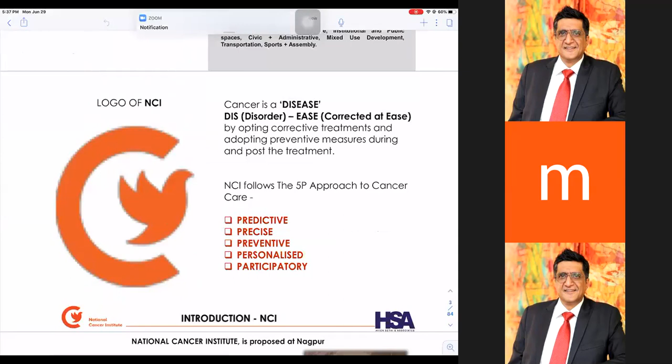About this NCI, it all started with what the client stands for. So the logo of NCI, when we saw it, we wanted to understand before we start our practice and put design parameters on paper. We understood where the client comes from. NCI has been a trust which has existed for a long time. We first went into the philosophy of their work and their aims and objectives.

We summarized their whole understanding into a basic part: cancer is a disease, a disorder, and it is corrected at ease by opting for corrective treatments and adopting preventive measures during and post treatment. So what they followed was 5 P's, which gave us the base where we formulated a design strategy. NCI follows the 5P approach: predictive, precise, preventive, personalized, participatory.

This was the brief given to us, and we were supposed to design the whole concept with these parameters in mind and what NCI stands for. The site was on a highway in Nagpur. We wondered why Nagpur, why such a big hospital was needed in Nagpur.

Then we realized that it is the demographics and topography of the hospitals there, that this would ideally become a central hub for cancer treatment, not only from Maharashtra but also from Madhya Pradesh and Karnataka and so on. So this has actually become a hub for the Cancer Institute, and I see lots of people who used to go to Tatas have started diverting into this.

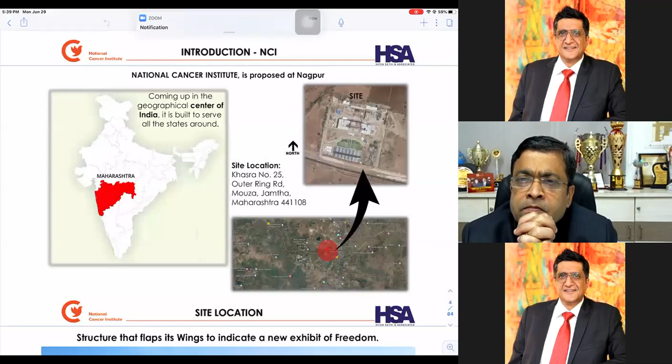I really had gratitude that it was a seldom opportunity that I got to design this particular thing, and years later my mother was being treated here itself.

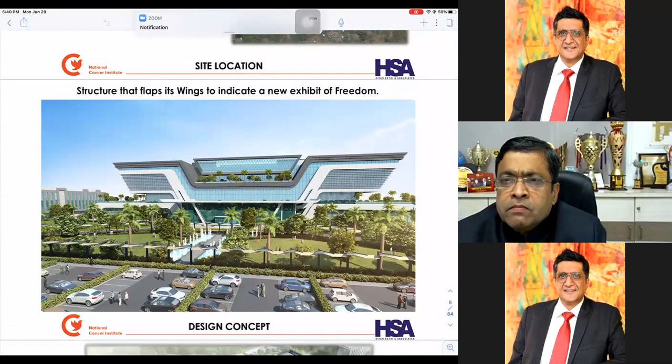The whole concept of a bird flying freely gave me a particular concept of a structure which has flaps in the form of wings, which indicate a new exhibit of freedom. The whole design moved around a particular concept that this building should depict certain characters which NCI stood for.

It was on the main road, the main highway, so it became very imperative for me to have something very imposing in terms of an architectural piece. The whole philosophy started moving around what kind of design we would like to do.

We break the buildings into various parts and make 15 buildings into one particular complex. But I have been very savvy on open spaces and greenery, and normally like to work towards reducing heat island effects and improving the ambience. So I decided that for this particular project we need a self-imposing single mass structure as phase one, which is around a 500-bed hospital.

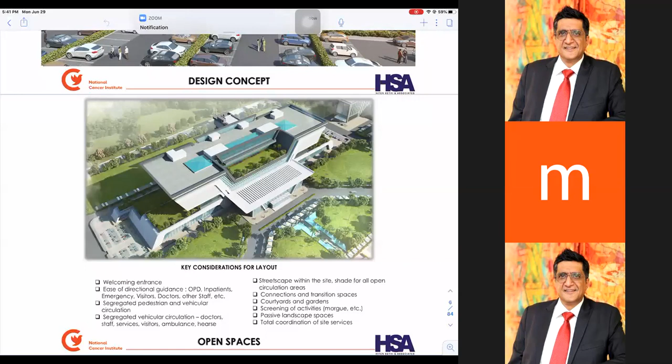This is the whole bird's eye view of phase one, where we had a very welcoming entrance. It was important that ease of directional guidance is maintained, since once we enter a hospital we are already lost in the whole volume and gamut of areas. So the design depicts a very unidirectional and simplified guidance system in terms of OPDs, inpatient, emergencies, visitors, doctors, and staff. We segregated all the kinds of traffic that would use this property, and then we started designing the whole thing.

Vehicular and pedestrian entrance, because the space is quite huge. So a smart, convenient system was evolved for ease of people walking, with a segregated space for driveways so that people do not interact on that surface at many places. Streetscapes were designed accordingly with shades for people walking in.

Water bodies were introduced in the circulation patterns to create a better microclimate. All the transition spaces inside and outside the building were interconnected, and some transition spaces were created so that it does not feel like moving from one environment to a completely different world.

A lot of light wells were created in terms of courtyards and gardens. Activities that need screening, like infectious diseases and pandemic-related concerns which may come with a cancer patient, need to be approached in the same way.

Passive landscape spaces were organized more efficiently. Most important, the whole MEP of the building was integrated so it looks like one unit, with total coordination and synergy.

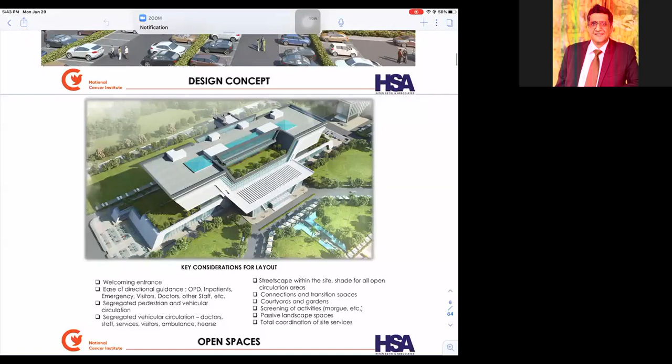If we look at the master plan from the southern part, we had a complete highway, and we were able to create a 9 meter road, now increased to 15 meters, as a service road. Once you enter, there are two ways in. You have a lobby area at the ground level, and then the main hospital building, shown in brown color.

We also had a future phasing planned, which will include studio apartments for bachelors, RMO quarters, nurses hostel, nursing college hostel, and service buildings, since services are a huge requirement for this project.

Yatri Niwas was included because in hospitals there is hardly ever a place for relatives to stay. With cancer being such a disease, one patient normally has four helpers or family members accompanying them. These are not OPDs where people come for a day or two and leave; these are treatment times, and if a person needs to stay, it's for a longer duration. Otherwise it's just general OPD or other treatments after which people can move out.

The whole area was evolved with minimum distances, a smart planning for the campus. All walking distances were kept below 100 meters so there is no major travel, while still maintaining independent privacy and private green spaces throughout.

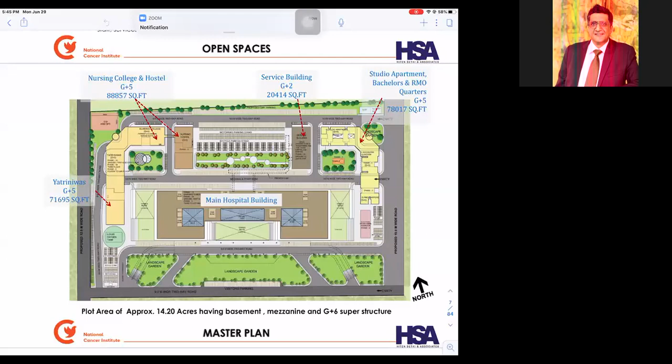The basic features included the main building along with other campuses: Yatri Niwas, Nursing College, Hostel, staff housing, facilities, and utilities. Though each has a different identity, they are integrated through a very robust IBMS system, in which all services can be monitored from a single space.

Just hold on, hello. Yeah. What's that? Just hold on, so this IT should make it work.

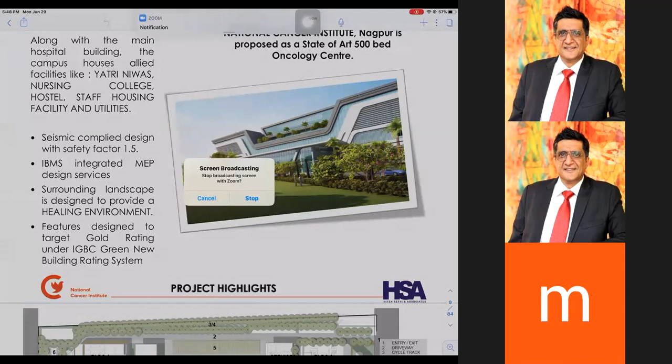This notification is still not going through, huh? Waiting room, share screen, chat with... Okay, so can we start now?

I'm sorry, I think the traffic flow got a bit out of proportion for people to handle. Anyway, the whole project got registered with the IGBC gold rating system, and now I'll explain exactly how we approached it.

Looking at the whole site, we had a beautiful long site. At points 1 and 2 we had entry and exits. We had complete driveways for people, which were later converted to create a richer ambience between the car parking spaces, and we created cycle tracks around the site for people to move around on bicycles, referring to staff and even doctors.

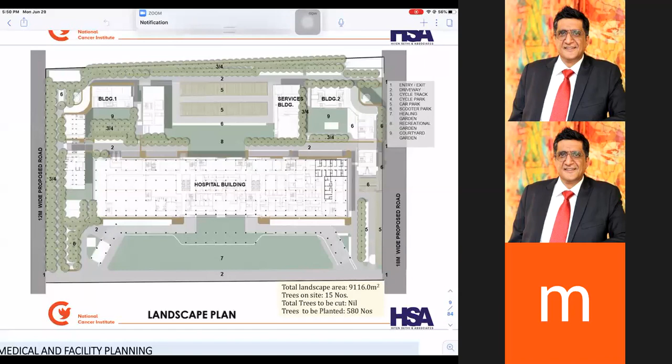So there are different kinds of amenities which have been created at different levels of the hospital as terrace gardens, as well as open spaces on the ground, wherever available. As far as medical and facility planning goes, we have created diagnostic and services, emergency services, ambulatory services, surgical suites, clinical and general support staff, and hospital engineering services. These have been the main services which have been organized.

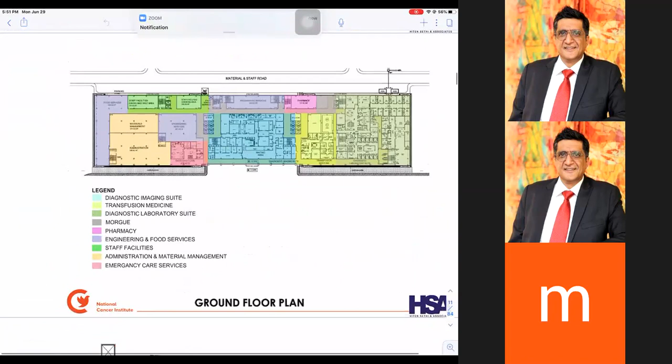Now, looking at the basic planning of the whole system, we have created a ground floor plan in which, at the entrance, we have to add another 10,000 square feet of reception lobby because the response we saw at the opening of phase one was tremendous. The whole thing was designed as a double height structure.

When you enter the ground floor, we have the emergency care service unit, which you can see in the pink area. Then you have diagnostic suites placed on one particular side. The central area is taken care of by transfusion medicine on the right, and then we have diagnostic laboratory suites.

Food service units were placed on one side, next to Yatri Niwas, so both things can function together in a single huge kitchen. Then we had administration on one side next to the emergency services, so people don't have to walk too much distance and can use the facility at the most appropriate spaces.

Then we have the diagnostic imaging units placed on one particular side, consolidated into one unit, so that it becomes a consolidated area with minimum passages and all interconnected activities placed under one zone.

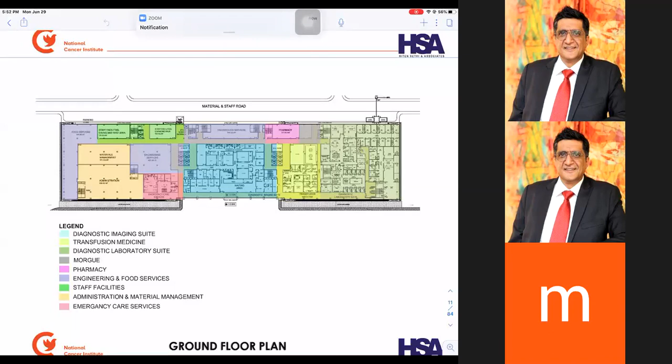If you go further, there were two bays of centralized lifts - this bay, and then another bay for doctors and other people on these particular sites.

We also created some internal staircases for services happening at the basement level and so forth. This whole ground floor facility eventually catered to people who had walkable requirements. Mind you, the main lobby area is not in this particular plan - it's a segregated block, all connected to escalators from the top and ground floor.

If you go further, we go to the basement. There we had treatment rooms, and you see the four Linacs which have been created as radiation rooms. These were eventually created with 1.2 meter, 1.4 meter thick walls, and in places around 2.4 meter thick walls. Then we had treatment rooms, because before going to the Linacs, there is treatment planning required.

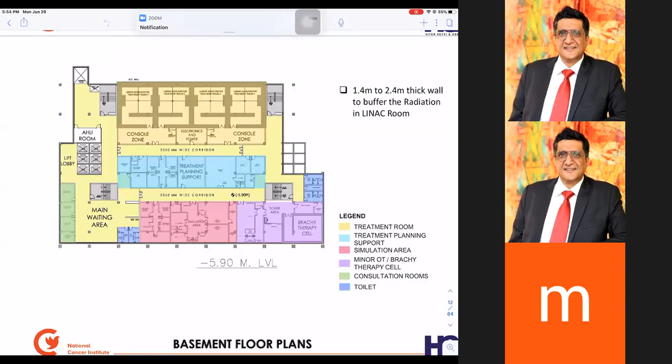It's centralized, so people coming into the corridor between the Linacs and the treatment planning come to this particular area - they are all interconnected. So all the radiation therapists, chief medical physicists, and physicists were placed in this particular chamber.

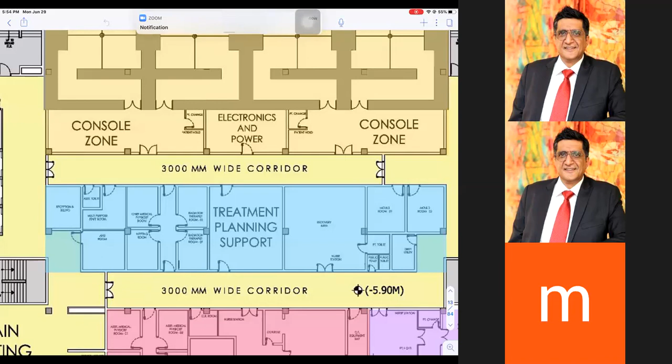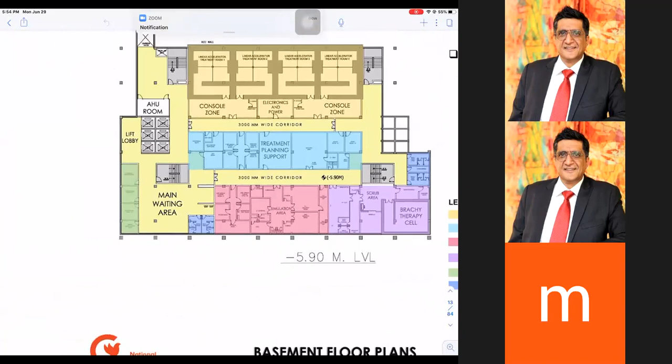The molds which are required are also created here, so once a person enters this zone, he doesn't have to go out of it. Similarly, in the simulation area, we had physicists with CT simulators and MRI simulators, shown in this pink area. Then you have scrub areas and brachytherapy - the brachytherapy machine in this plan is one of the latest machines available in this part of Asia.

Similarly, these are the banks of lifts that enter this zone. We actually took only one set of lifts from one side to enter this basement, because it's not a full basement, it's a small basement, so that we can control the flow of people.

Similarly, on the mezzanine floor, we also had the double height Linacs. Then we created physical therapy units with medical records, and all the services for the lower levels, including AHU chillers, were created in this particular area.

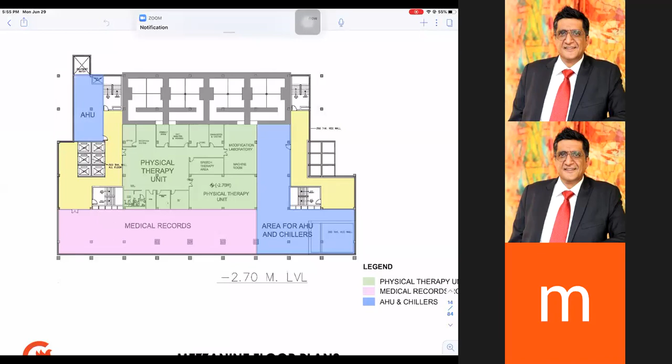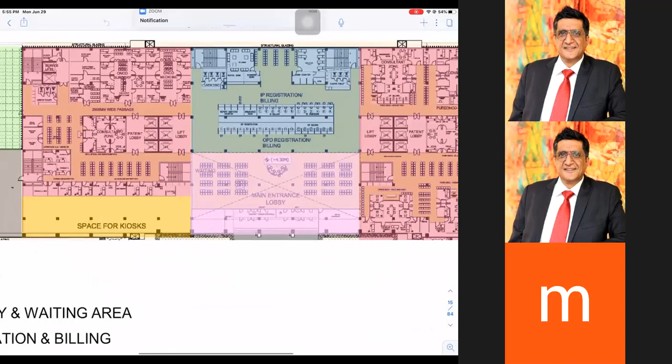Then we had IP registration zones at the back. All the waitings are next to the structural glazing. All these particular things are created in all the waiting areas, which have natural ventilation and a whole lot of consoling and different kinds of waiting rooms required for the people.

So individual toilets have been placed next to the staircases, so that there's no further movement.

So we had different zones now coming on. We created OPD registrations over this area. Then we had given a clean open space for people to go to the cafeterias.

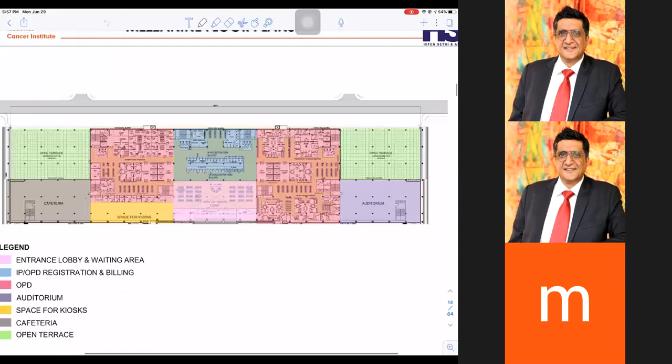On the east, we have placed auditoriums, basically for the academic staff and doctors, which again have an open terrace. At times, they have lots of discussions and programs happening in knowledge sharing and case study sharing. There are also lots of research centers which have been introduced later on in this particular zone.

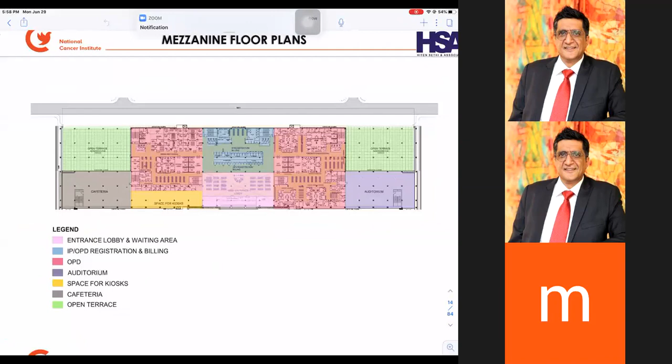As you go higher, we have another first floor plan which has similar kinds of facilities, with male and female general wards placed at one line. Now you see there are inclusions of two daylight skylights which have been introduced.

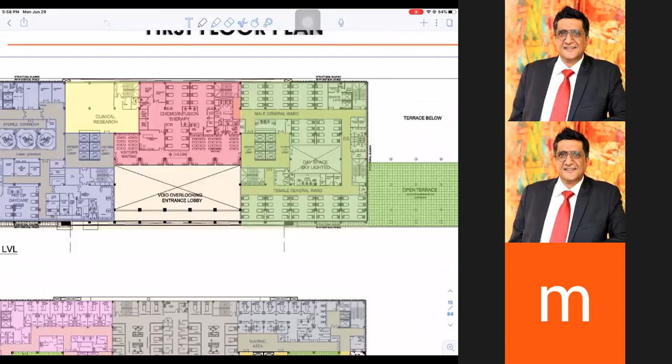If you see this, these are basically created so that when we have the wards coming inside, there are lots of lights which keep infiltrating into these particular inner areas. So all these particular spaces were created in such a way that all livable spaces have natural light happening at all times. Then we had a void in the middle.

We had the chemo and infusion therapy room with clinical research happening on one particular side. Then we had pre-op daycare beds and sterile areas, where lots of sterile and clean corridors were created in terms of organizing the whole system as a centralized thing around PICU and OTs.

Similarly, as you go up, you see another courtyard now being added because the functions change on the upper floor. And again, I needed the lights, and all the corridors need to be lighted. I don't like dingy spaces being created inside my rooms.

You have lots of this in terms of emergency rooms and PICUs. Independent waiting areas were created, which also overlook these open areas. So at any given time, there was no congestion in individual cases, not even in ICUs, which were centrally located.

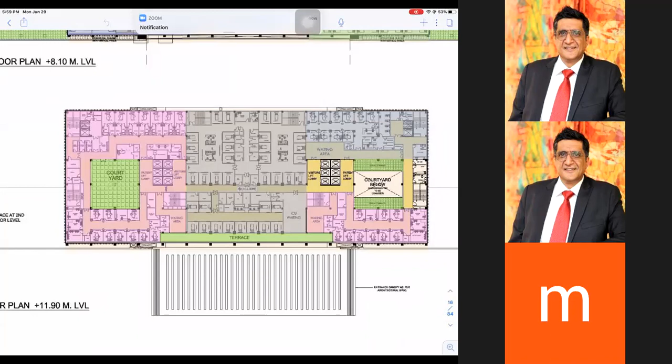Whatever you see, different patient sections were created on either side of the building. Again, you see the terraces now recede down, but then there are lots of semi terraces being created now within the building, with some recesses.

Then on the upper floor, there are lots of academic blocks and all being created, which had SICU and so on. It's the same benefit we've been creating out of the whole thing.

Then we have admin and academics, which enter on the mezzanine floor. Actually, the fourth floor was the main floor for OT, operation theaters, and so on, so that we had the skip floor on the upper level, where I was able to use these particular areas for services required for OTs. Now we have converted part of these particular areas to the administration also.

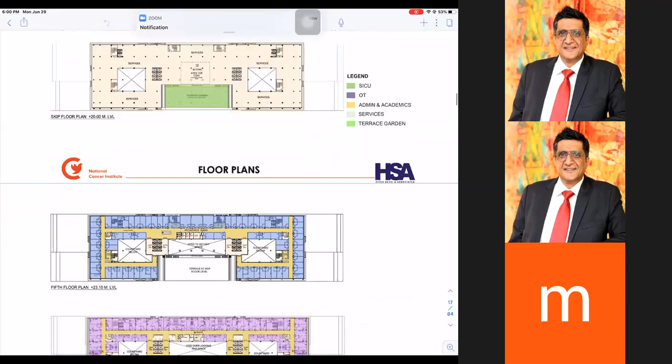Again, on the fifth floor, we had pediatric wards. Then we had bone marrow transplant units, which needed special kinds of isolation and treatment. And then we have executive rooms for that.

So for the whole particular thing, as you know, NBC allows only 45 meters. So these are basically, this is a typical section of the whole building which we sort of got.

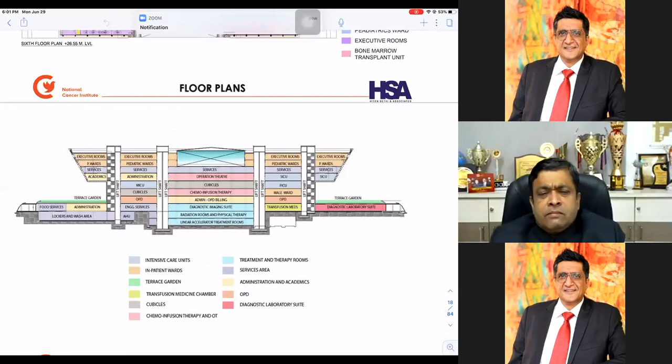At every given place, we were able to segregate it with similar kinds of vertical and horizontal circulations, so that there's no crisscross connections of any kind of movement space happening within this particular design.

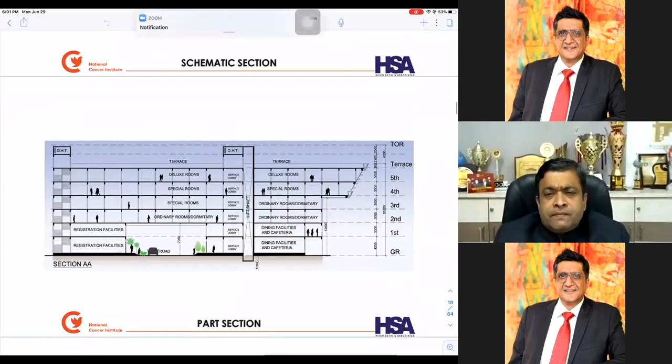Mind you, this cantilever which you see is a 21-meter cantilever which we were able to achieve. It itself was structurally a big challenge to create.

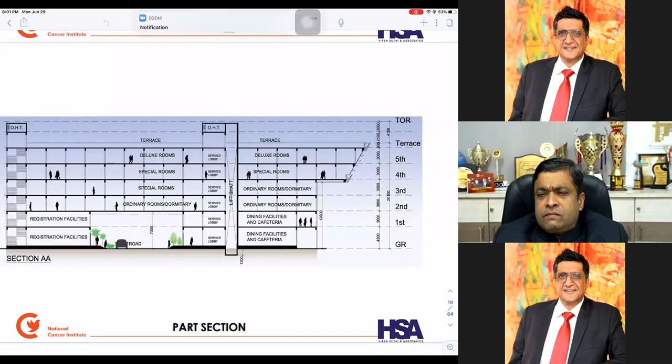So after my third floor, I had to convert the buildings on either side, east and west, into steel structures. We got Jindal JSW as a collaborative partner for contractorship, because it was a very delicate job designing a 21-meter cantilever building with two live floors on top of it. Overall, that's how we segregated the areas when splitting the steel structures, and we were able to come to around 7 lakh square feet for the whole main structure.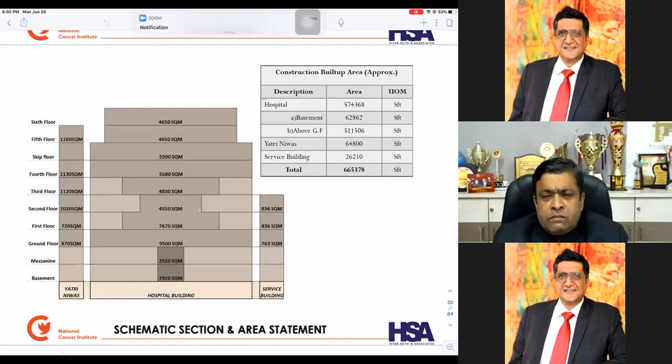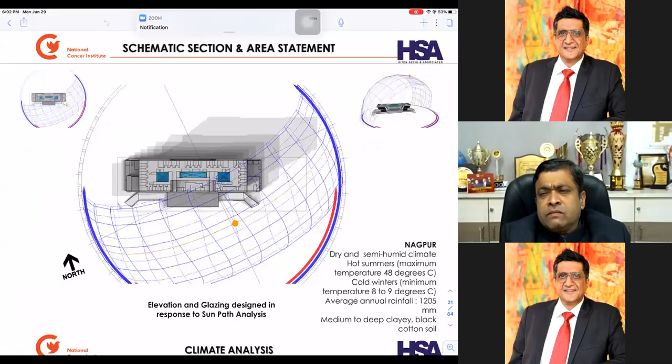So before we actually design, these were the internal plannings. But what happens is you actually start a particular design with the orientation depending upon how your climate is going to be, because the building had to be fully air conditioned.

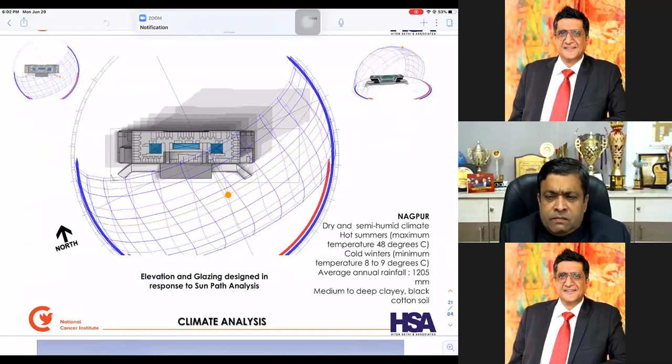So the most important thing is your design has to be sustainable. You have to study what kind of climate exists there and how hot the summers are. We have actually laid the slabs though officially they say 48 degrees, but unofficially everybody used to say it's going to be 50 or 49 degrees centigrade.

And even for curing of concrete, when the casting was going on in the evening, we had actually arranged ice at site, so that the curing goes on well in time, and so on. Similarly, climate analysis was taken care of.

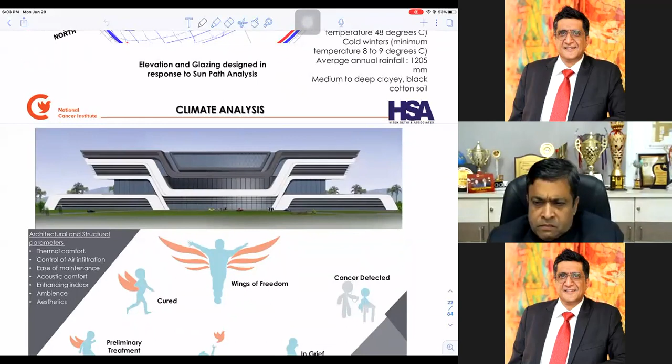So the whole idea was to have a very comfortable indoor air quality, air infiltration, and thermal comfort in terms of all the kinds of climatic changes which happen in Nagpur.

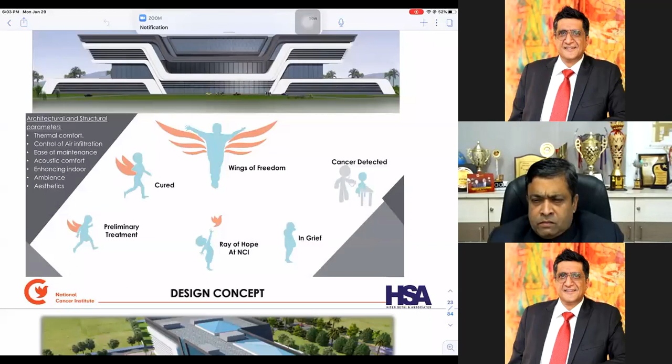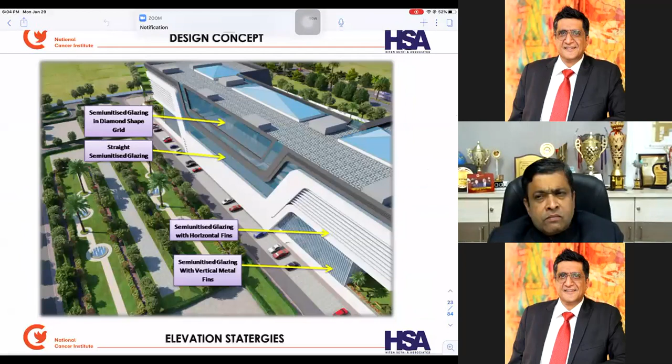So these were the studies on how things are to be done. And as my usual part is, somewhere I needed a diamond shape grid at the top. We created a diamond grid shape, and then a semi-unitised glazing at the bottom. Then we created louvers for the users to see the rooms which were there. So I didn't want to give direct sunlight over there.

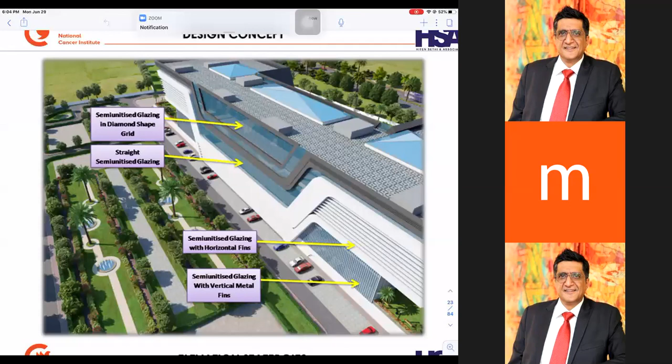This is a southern face, so we created a lot of deep louvers in terms of horizontal fins. And with these kinds of cantilevers, there were shadows created simultaneously, so that the efficiency of the building was taken care of.

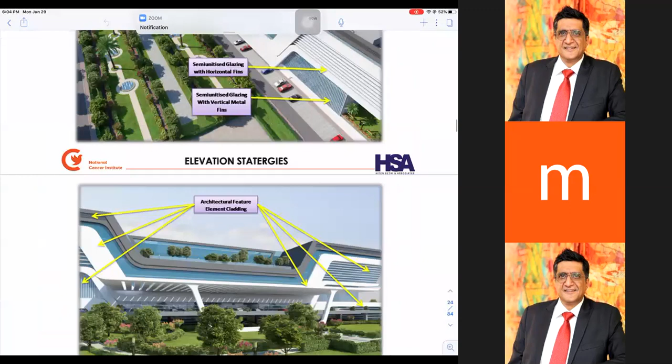So with this kind of cladding, there were vertical claddings, vertical louvers, and horizontal louvers, but the whole feature was composed by keeping minimal glass and more mass, though it gives a very beautiful and plush kind of feeling. But the glass-to-wall ratio was kept only 22%.

So as architects, we normally believe in creating two sustainable parameters, dividing them into active and passive design. Active and passive design features start right from the time you actually start the first SketchUp of your planning, where you see the different strategies of daylighting, natural ventilation, and solar energy.

But at times you have to take a decision—though I had a south-facing wall, do I give my facade and orient the building east-west so that the dead face is on the south? Or, because I wanted a self-imposing mass on the highway with a great depth of landscaping happening, can I do some strategies in which we still have better efficiencies of energy?

So then we did our modeling in such a way that all the public spaces which had to be given a glass facade, like lobbies and corridors, had very deep recesses of sunshades, which gave us better thermal comfort inside and definitely natural lighting.

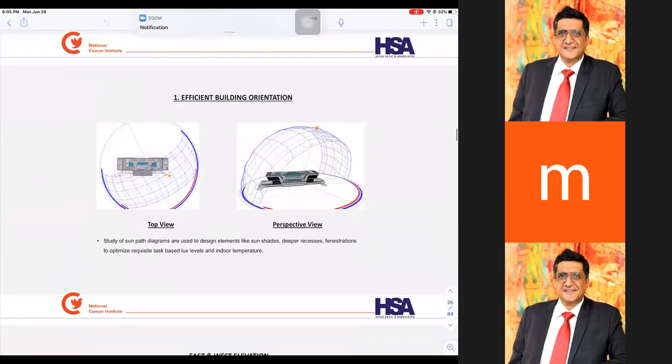Once you do this, you are able to evolve what your uncomfortable zones are going to be. Then the strategies of sunshades, deeper recesses, and fenestrations come in. At the same time, when you have deep fenestration, you have to take care of the lighting quality of the spaces inside.

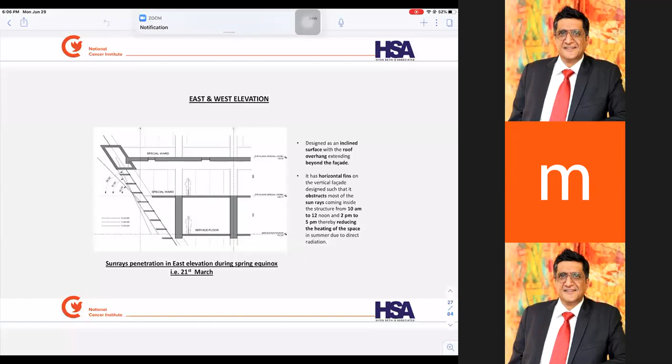Once we started working on this, the kind of cantilevers we created, we looked at what should be the horizontal recesses in terms of during equinox. We did some studies on what should be the depth kept for the sunbreakers we were creating, whether there should be any angle or inclination that may give a better response to natural light, and so on. We created these studies in all four directions.

So we had the south side which had the longer side. We had to give a straight vertical face and also horizontal fins depending upon the elevational treatments we created and the depths of overhangs, so that appropriate penetration of direct sun rays happens inside.

Basically it's all about creating ambient comfort areas and temperatures inside the building as well as outside. Most of the time people talk about better indoor quality and thermal comfort inside, but it's equally important that outside zones are comfortable too. That's when we came up with the concept of huge cantilevers protruding out - you can see in this building how these things move around.

Then we started working on increasing the glass standard to a certain height, so we added some glasses after that. After a basic study, from 22%, since ECBC norms permit up to 40%, we increased some zones, like in cafeterias, adding more glass area in that part, and increased it to 38%. Still, the ratio was within limits, so optimization of glass was achieved.

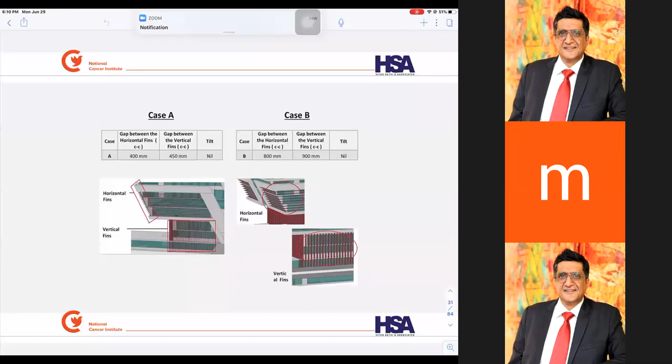So what we did was create two or three scenarios with gaps ranging from 400, 450, to 800, 900, and certain tilts we'd allow architecturally, like 20 degrees or 15 degrees. We did all this analysis because these are major parts of my facade, so I need to be very conscious about the detailing of my elevation. We checked if there's no tilt with this combination, what it would be, and if the gap is 800 or 900 with a certain tilt, what the case studies showed.

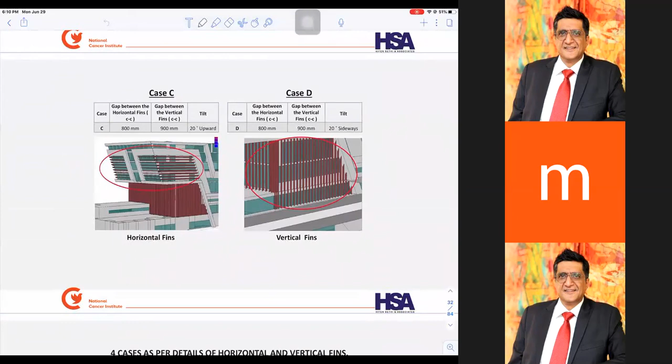We came out with the whole parameters of 4 different case studies in which we created simulation models about comfort and light penetration, and got results for these 4 evolved cases - with gaps of 400, 800, and so on, covering all ABCD cases. Similarly, on the vertical fins, similar studies were done, and we also studied tilts between nil and 20 degrees on the whole structure. Then we came to a particular conclusion.

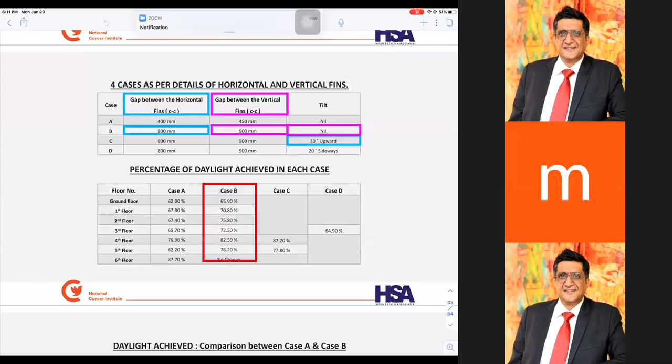If you see this particular figure, the percent of daylight achieved in each case on each floor, we were able to put it as case A and case B. We also had a case C, which was actually 800 to 900, and we saw that the results were not that comfortable, because at times the daylight was there, but it was adding up to the glare also. Cumulatively, I think we worked out a particular average system in which case B turned out to be a better solution for us, with overall performance working out much better.

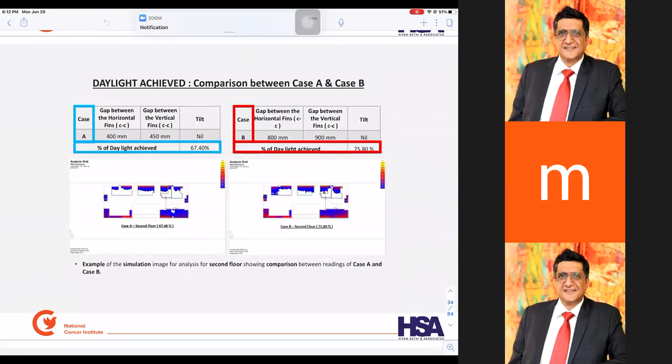So these are another studies, Ecotect models which we created, in which the imaging was done to analyze that second floor, showing comparison readings between A and B. So we did actually these thermal comfort studies.

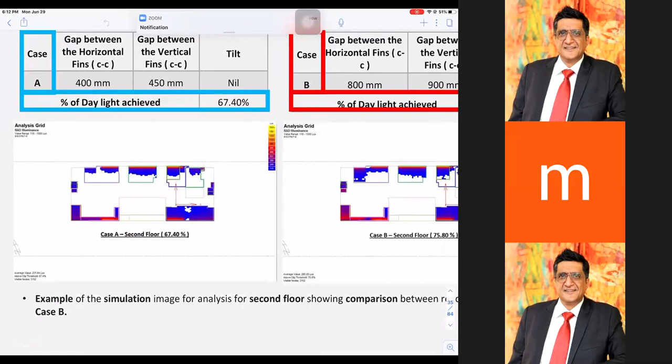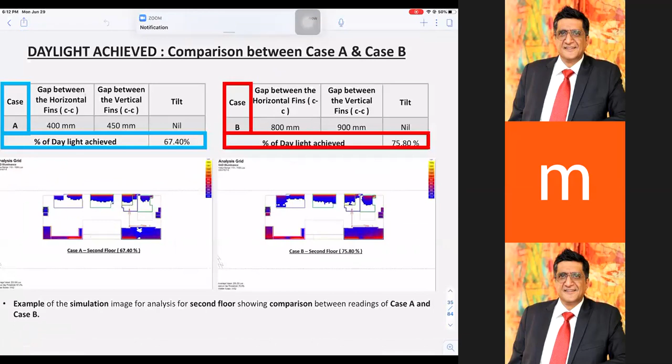So for daylight, when we do a 400-450 arrangement without any tilt, the percent of daylight achieved was around 67% in case A. When we did the 800-900 case study, the daylight achieved was 75.8%. At the same time, rather than having rooms, we started having huge lobbies on these particular sites, so that the best environment can be created in these zones.

Similarly, on different levels, we created terrace gardens. Gardens next to the wards were given so that patients can actually have their recreation in the evenings on these terraces, so they are not confined to the rooms. Seva workers were introduced in this particular campus, who actually help you like an assistant, and they take care of you today also.

Second benefit I got was that the heat penetration from all these roofs decreased. The top floor was going to get covered by solar panels, so I was not worried about that, because there's a good reflection happening from solar panels. But at the same time, where active rooms are going to be below, these terrace gardens not only help create a healing garden for different users, but also help reduce the heat island effect for the building.

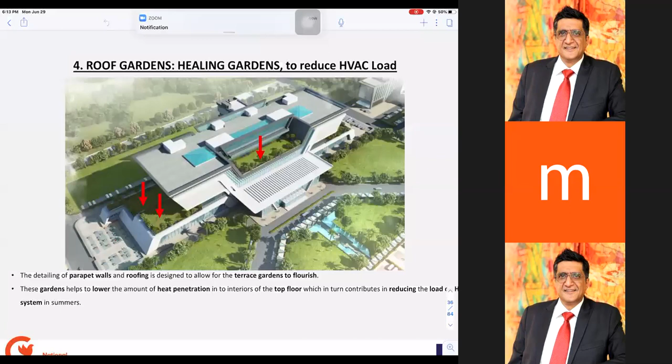We did an initial strategy, but the work was still going on. What we did was we actually installed the first 0.79 megawatt solar plant initially. As architects, when you do calculations of your estimation, around 3 to 4% we keep as a cost for contractors for electricity. So my 500 thing would have cost me, with 4%, a huge amount of money on electricity - if not less, it would have been around 20 crores plus.

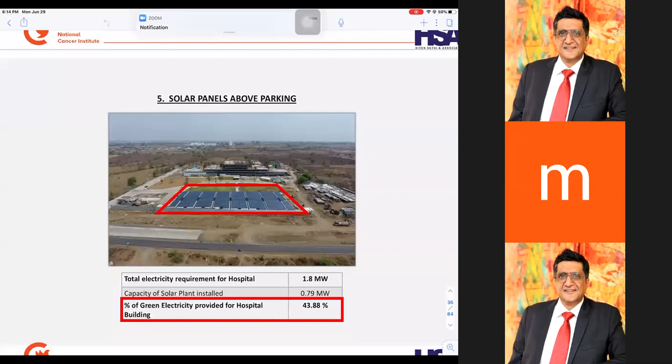But with this particular thing, till today, I don't think we had a need to buy electricity for construction for some of it. Just installation of 4.5, 5 crores of solar plant, I was able to save a running cost of 5 crores every year. That's the kind of benefit we got, appreciated on this particular thing on various factors.

So overall, what were the conclusions? We were able to minimize the VLT of exterior glass to 35% to use maximum daylight. The gap between certain shades was from 800 to 900. The horizontal fins were to be tilted 20 degrees upward for some part and straight for some part. We were able to actually come out with a study on the whole thing.

Finally, with all these particular strategies, we had a reduction of 25% of annual energy required for interior lighting, and a reduction of 52.9% of annual energy required for fans could be achieved. So lots of sustainable features which worked out.

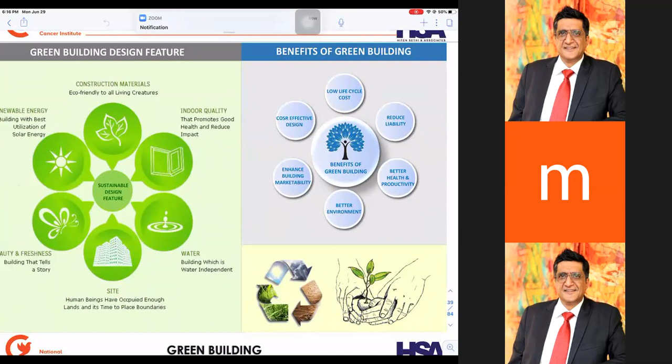So the benefits I got were low life cycle cost, reduced liability. By having healing gardens and creating such ambient spaces, we had better health and productivity, better environment, and building marketability gets increased because you have so many features. Most importantly, the happiness and comfort index for any person entering this particular space is itself a testimonial to effective design.

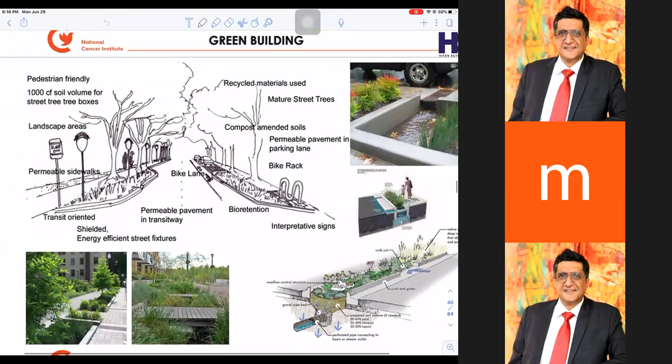Coming to the master planning, we actually created lots of biospheres and all those things. Fortunately, we had a biosphere around the plot, and we were able to use some benefits of this particular thing. So we created walkways into shaded portions all around, and we merged our stormwater drains in such a way that it becomes part of the landscape itself.

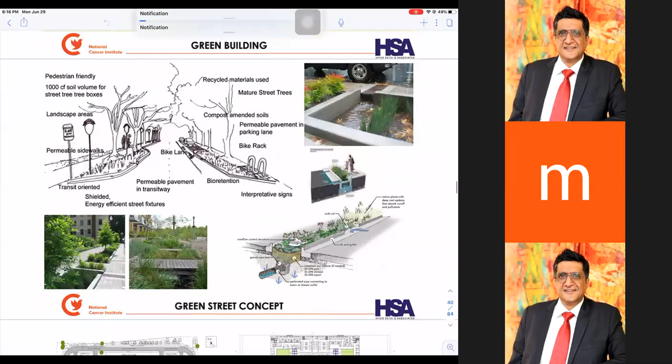Then, as I told you, we had healing gardens. So we had various strategies created as part of the design at various floors - first floor, second floor, third floor. Every floor had lots of functions created for the ambience to be more open from inside out. Those kind of things were strategized to give the user an environment to feel better, feel safe, and less stressed. So this was how we were able to create the whole thing.

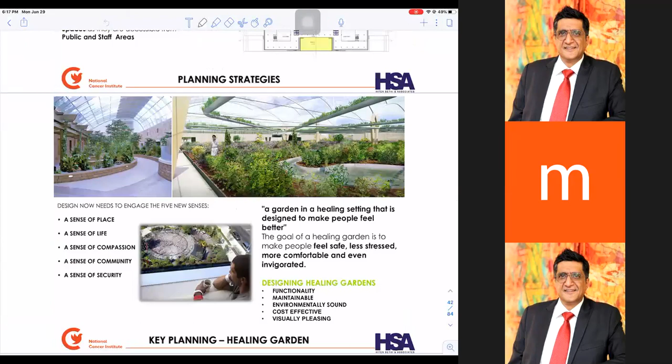For efficiency, we were able to do landscape drip irrigation systems. We have 40% of the area with vegetation, and lots of soil absorption strategies for water absorption. Rainwater harvesting is not restricted to only tanks, but the whole site acts as a tank. STPs were introduced, and all these things are talking to each other - it's not that AC is working alone and wastewater is working alone. So the whole water cycle has been created so that it's a 100% zero discharge project.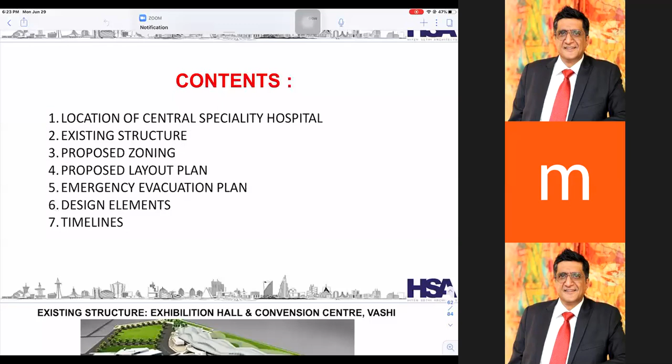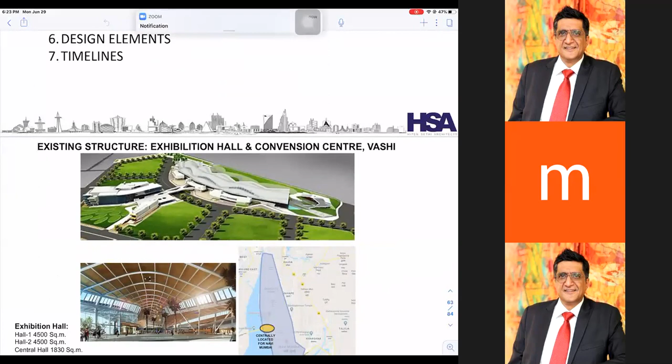The whole study was very important. Fortunately, it was designed by one of my friends, Ratan Batliboi, with whom I had worked when I was in college, and he was kind enough to provide us with all the data which were there. So we actually studied the whole system, and we realized...

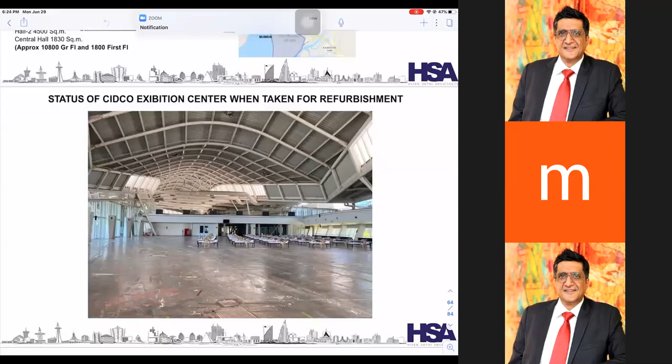When I came in, they were thinking that we need to create an isolation center like this, and I said it's not possible. There's a huge space with air conditioning and this kind of flooring. I think where would the hygiene go, where would the toilets go. Toilets are designed for an auditorium, but for a hospital there's a different trend. So we had to create more than 300, 400 toilet blocks into this particular zone.

So when we did this study of isolation quarantine care centers, we came out with the particular facts of what areas are required as a comprehensive study. So triage areas, isolation wards, ICUs, laboratory areas, CSSD units, central staff, ancillary support, kitchen, material stores, etc.

So these were the salient features of what we created. The area of the facility was around 1.42 lakh square feet. Total beds were around 1149. General beds were 632, with oxygenated beds also a requirement.

So you have one category of beds, and then oxygenated beds for further serious patients whose oxygen levels have gone down and require care. Then 10 triage beds, or observation beds you can call them, located immediately at the entrance. Then ICU beds have been created for 7, but no ICU treatments - it's only for the transit time, where some ICU patients come in so they can be taken care of. So they may have some ventilators and those facilities there.

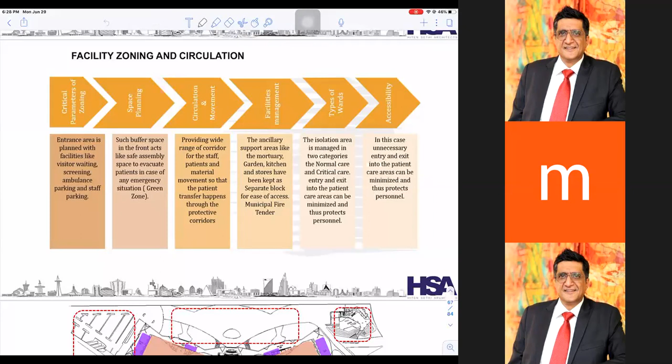So the proposed zones were created like this. If you see the purple ones, all additional toilet blocks were actually fabricated—within 20, 21 days, all these toilets were created. Each and every block in the central area, the ward zones, were given independent access to these toilets, so the whole ecosystem was running on its own.

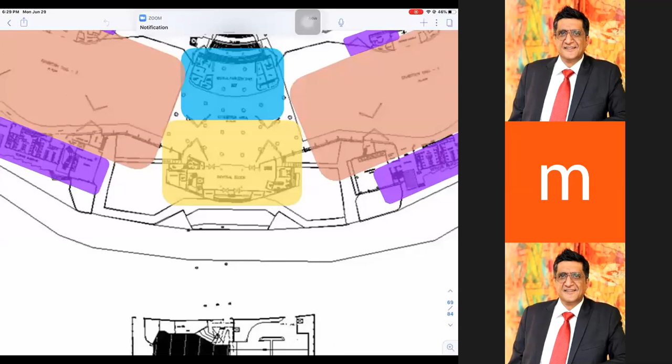Then we had an area secured for doctors, which you see on this site, a complete system where doctors, nurses, whoever come from the stay, can enter here—these are non-infected areas. And then this was the area for all the patients.

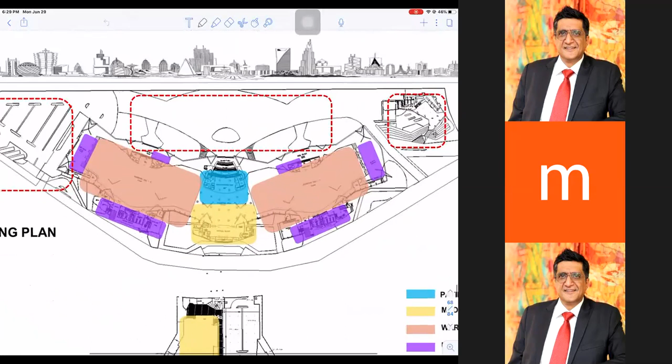So now we created some registration areas on this zone also. As you go behind—this is the right portion—we created a dormitory for doctors and nurses, and on the right we even created space for NGOs who were willing to help us. On the upper floor, again, we had to give the whole thing.

Once you come inside from this area through the registration counters, the central portion becomes the triage. Then we had different wards, each connected individually to the toilets, and they are secluded areas—you cannot move around between them.

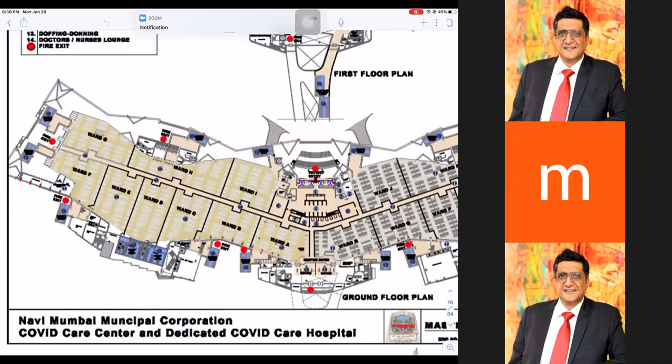Important safety factors we considered included adequate fire exits, because with oxygenated beds and it being a temporary facility, if anything goes wrong, each ward needed independent access systems. That was the prime safety factor we had to consider while designing the whole thing.

The whole building was air conditioned. As per new norms for COVID, we needed more air changes and purification of the air going out, so we got UV lights placed in the AHUs at the air-through areas, so that all air moving out is sanitized by UV lights, along with microfilters for all exhaust circulation.

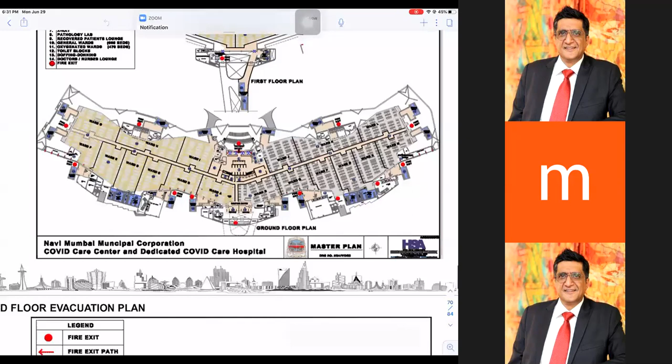So those microfilters were used in that particular setup. These were typically fire exit plans given with each ward. Every room, every ward was given a 65-inch TV.

The most important factor in COVID is that you have to treat a patient psychologically. So many things like yoga have been activated so that people are involved while staying there and being quarantined in these programs.

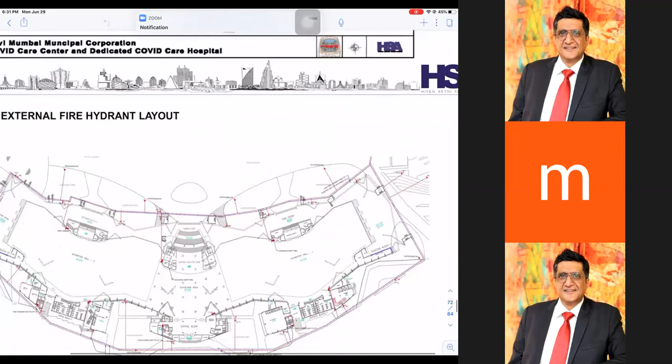So these were the typical systems in which we did the planning, and these are the doctors' dormitories. Now, in fact, we've been told to convert these dormitories into ICU beds because things are rising in Mumbai so badly that doctors can't come from their homes. So I think we are trying to do 100-bed ICU centers here.

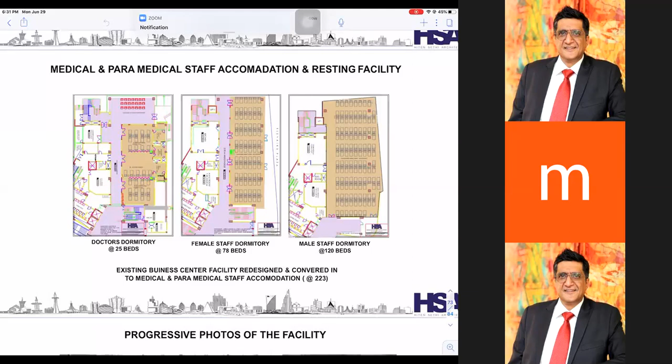So this is when we started the work, starting with partitions, just a 25mm partition system. It was a lockdown, I couldn't get anything, so I had to arrange 300 laborers and the materials.

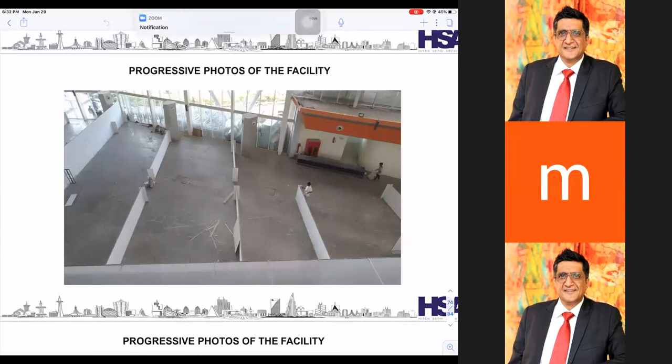Overnight we contacted companies who were able to support us. Fortunately we were able to get MS angles to this extent, and they were ready to give us in 48 hours. So the logistics started putting all these things together.

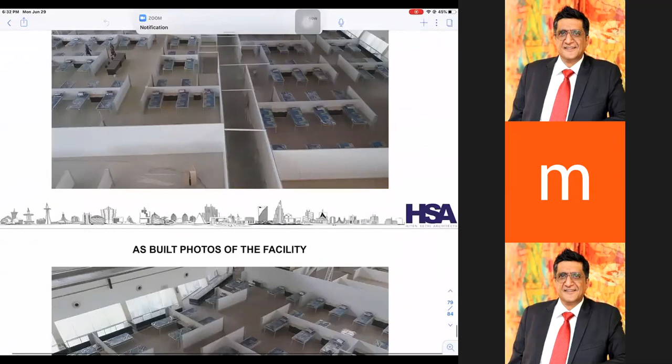These are day-to-day progressive photographs which kept on happening. The beds were made in Bangalore, so every day 350 beds were manufactured and sent to Mumbai from Bangalore. So the whole thing was very well synchronized, including the furniture.

Nurses stations, if you see, lots of nurses stations were placed, like every part had a nurses station overlooking the whole thing. TVs were given at two locations so people have some level of comfort.

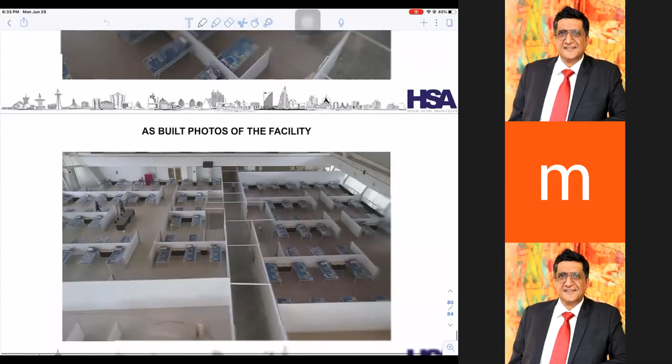The flooring was PCC, so that had to be converted. We did linoleum flooring, varying from 2mm to 4mm thickness in different places, so the light gives a good effect and the whole environment becomes fresh and comfortable. So this was what it was.

I think we can conclude this presentation by saying that human use, population, and technology have reached a certain stage where nature no longer accepts our presence with silence. So in COVID, post-COVID, or pre-COVID, we need to speak up, we need to act, and we need to respond. That's where I'd like to end my presentation, and I would like to thank you for your patience and time.